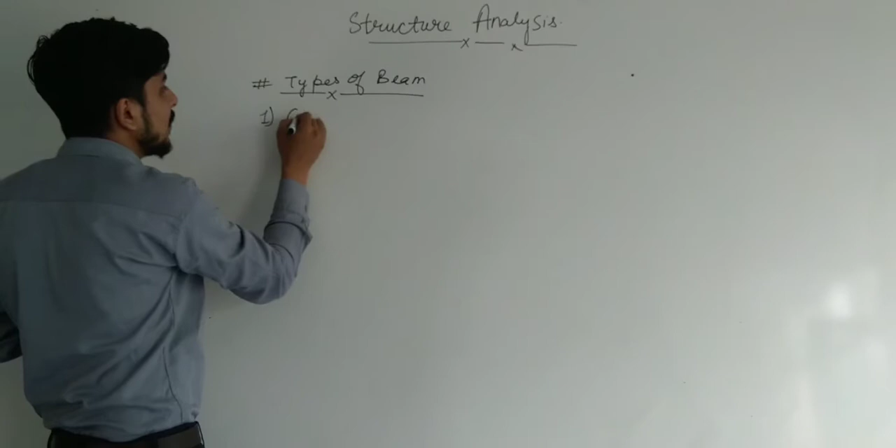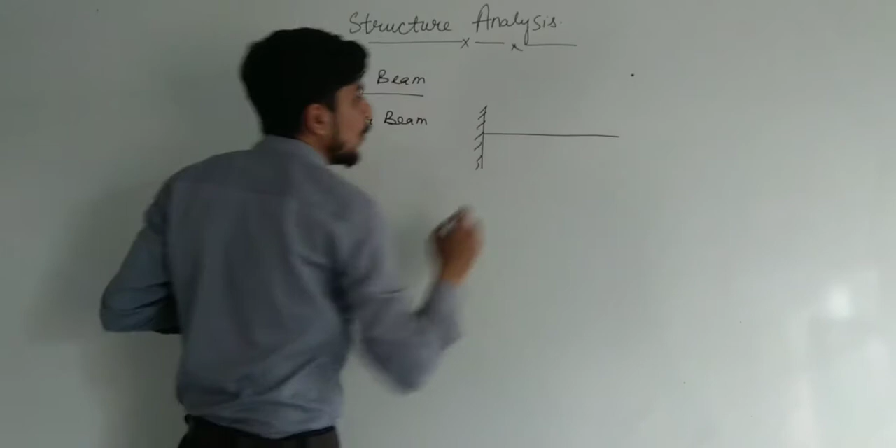Generally, these types of beams are used in the building to construct a building. The first beam is cantilever beam. In cantilever beam, one side is fixed and the other is overhang. This type of beam is known as cantilever beam.

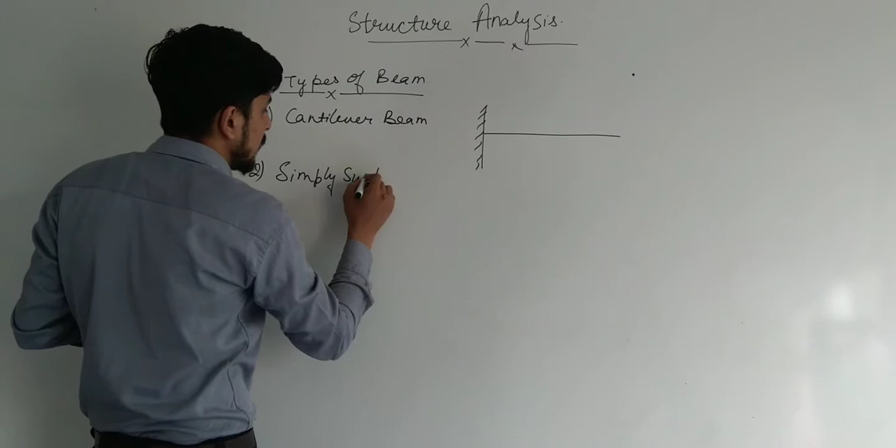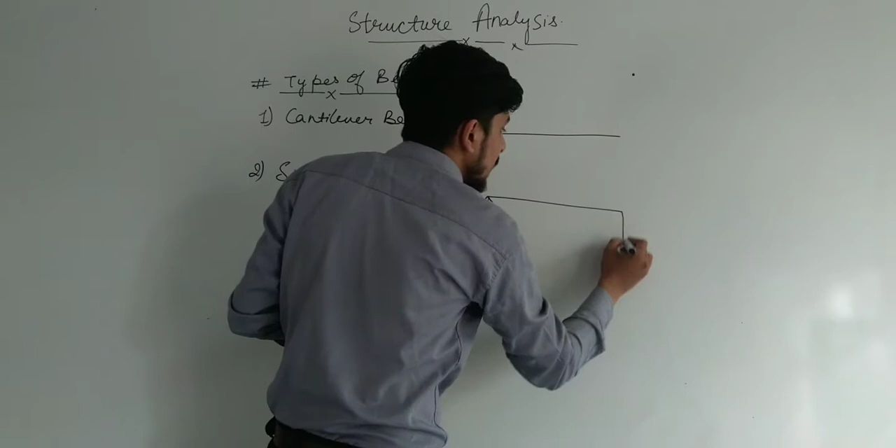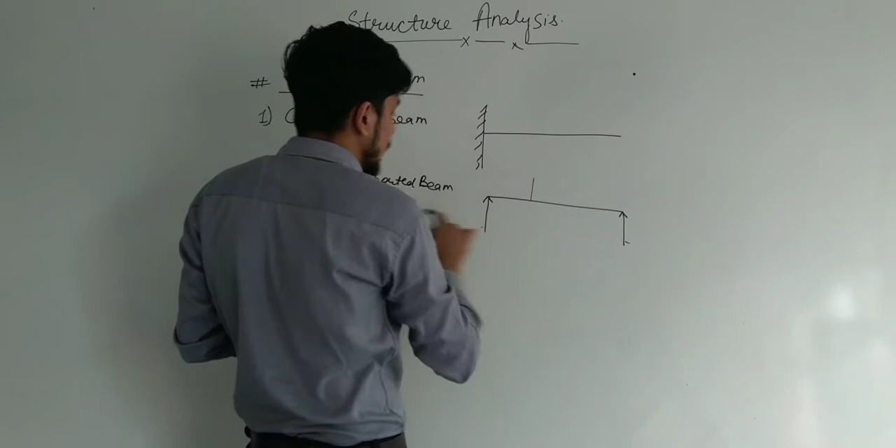The second one is simply supported beam. In this type of beam, there's a beam and the support for both the ends is simply supported, meaning there is a simple support from both the ends. You can see that this is a column, this is another column, this is a beam. So this type of beam is known as simply supported beam.

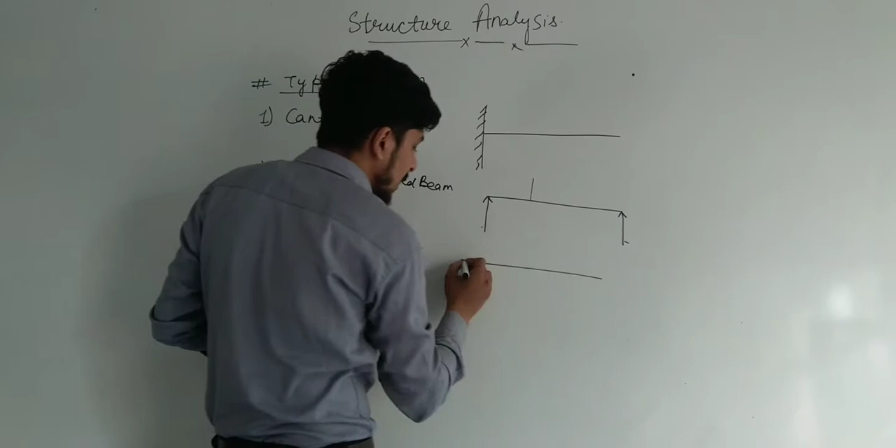The third one is overhanging beam. In overhanging beam, this is a beam, this is a support, this is another support. The beam is overhanging from one side, or you can say the other side. This type of beam is known as overhanging beam.

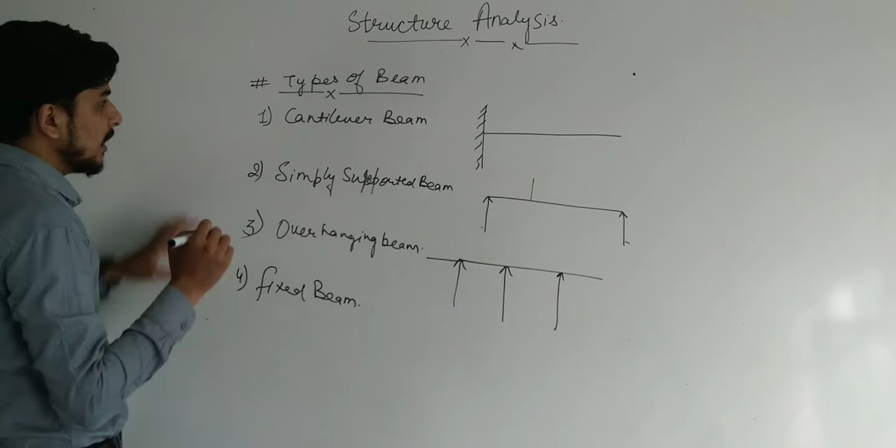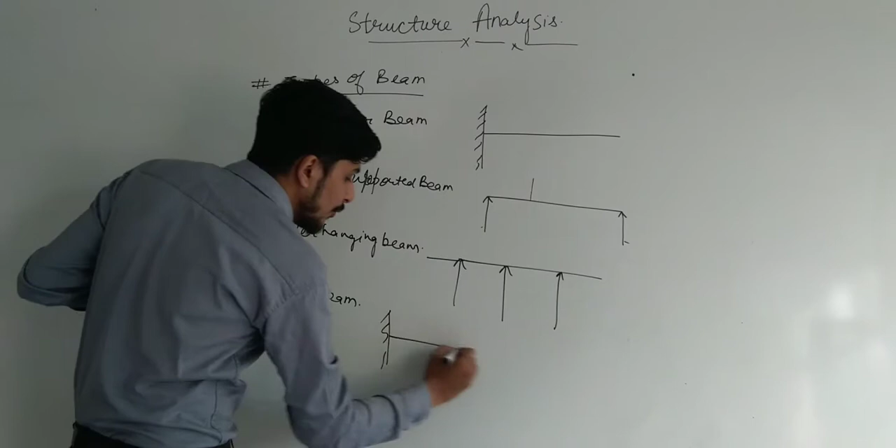Now the next one is fixed beam. You can say it is similar to a cantilever beam, but the cantilever beam has one side fixed and the other hanging. In the fixed beam, both sides are fixed, and in the middle there is a span known as the beam. So this type of beam is known as fixed beam.

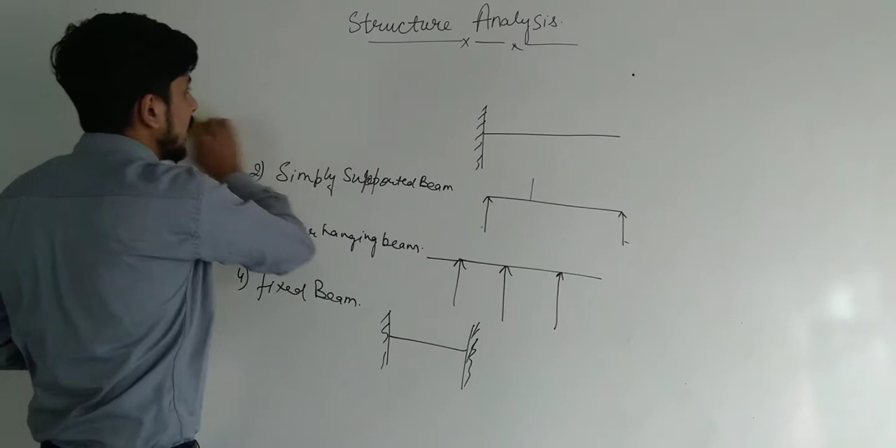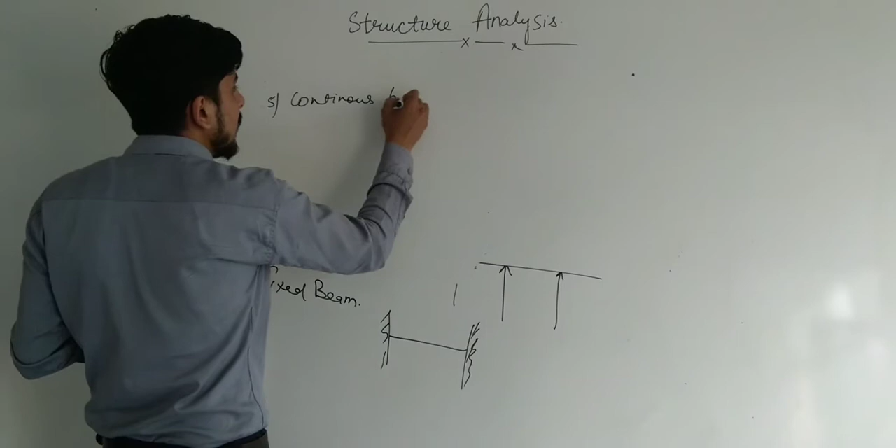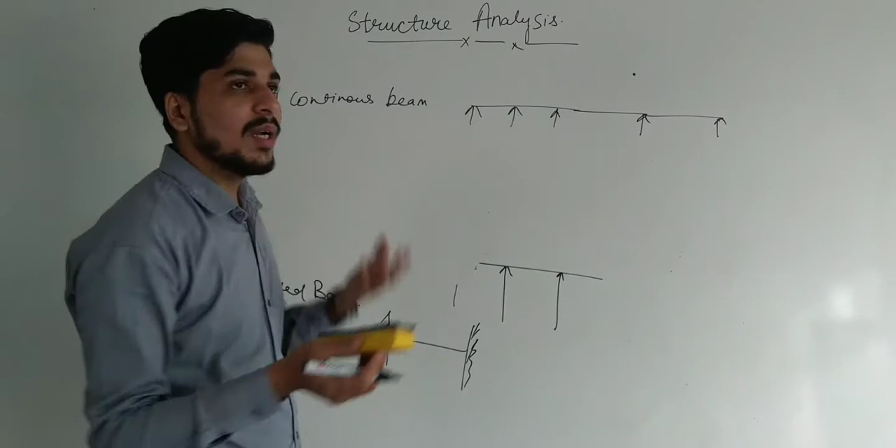The next beam is continuous beam, the fifth one. In continuous beam, this is a beam, this is the support, this is another support, and the other beam is connected and continuously moving forward, or you can say backward. This type of beam is known as continuous beam. So these are the beams which are used in a structure, in a particular building structure, at the construction site, and so on.

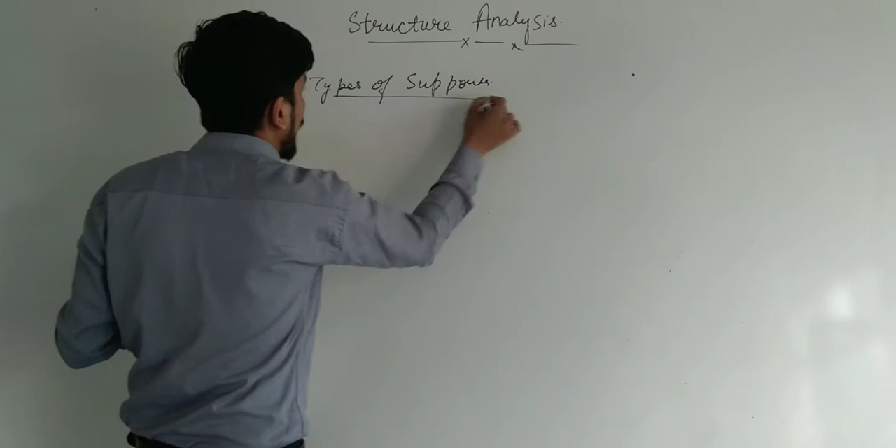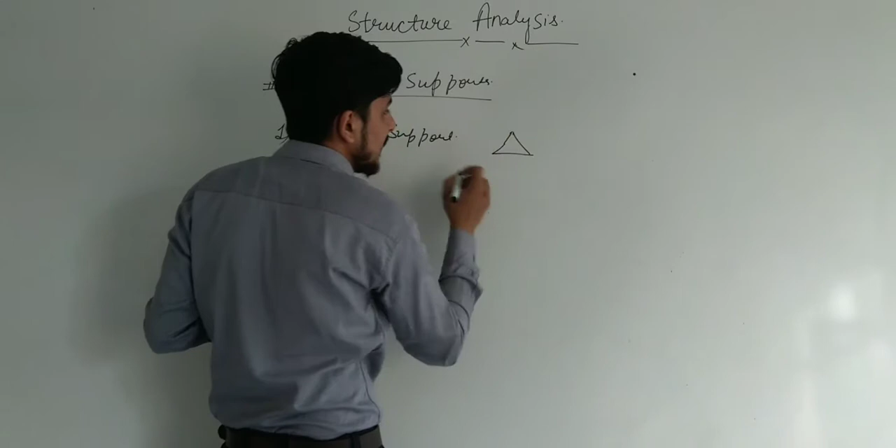Next topic is types of supports. The first support is fixed support. In fixed support, the structure for analyzing is like that - this is a beam and this is a support. Both the ends are fixed. So this is the fixed support over the beam.

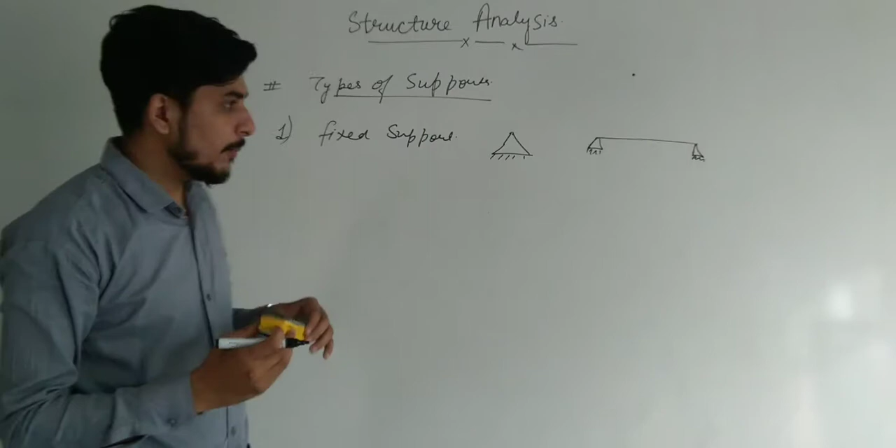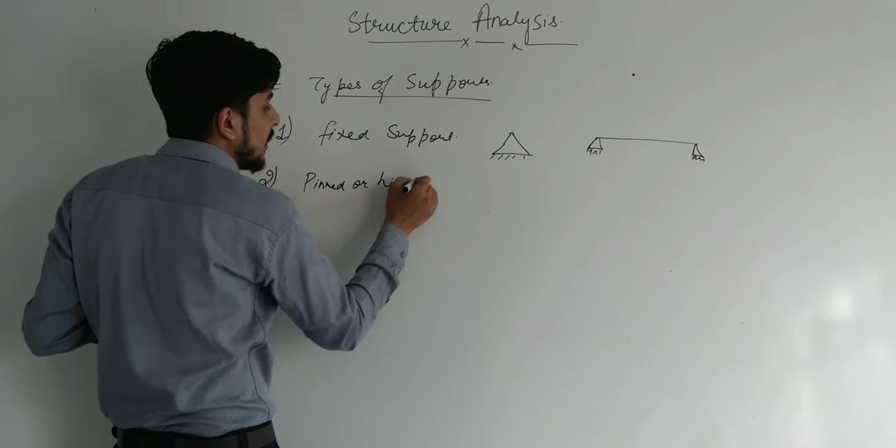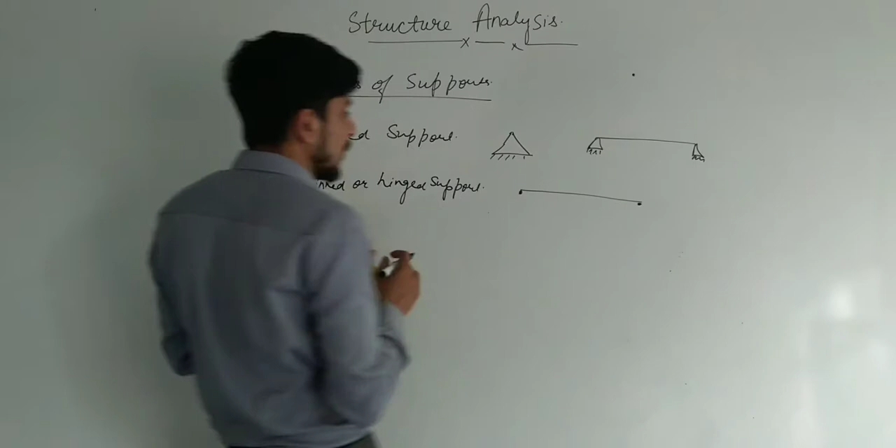The second support is pin, or you can say hinge support. This is the support, this is a pin support, or hinge support. In this type of support, both are fixed, both are hinge or pin support, and the upper beam is connected to both supports.

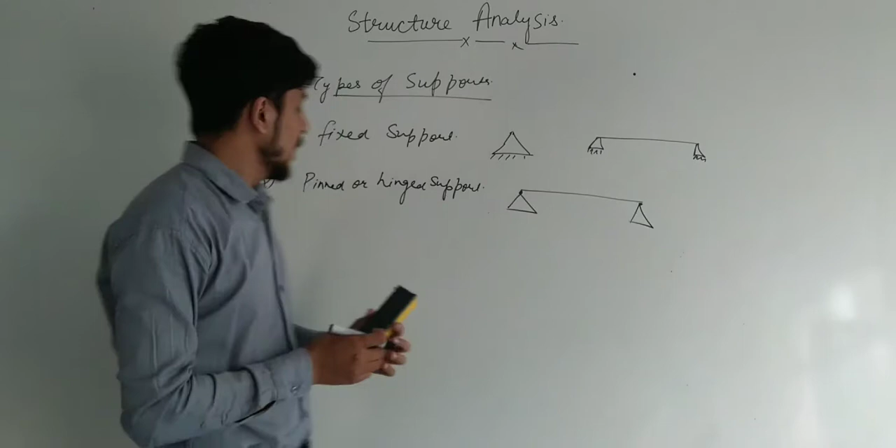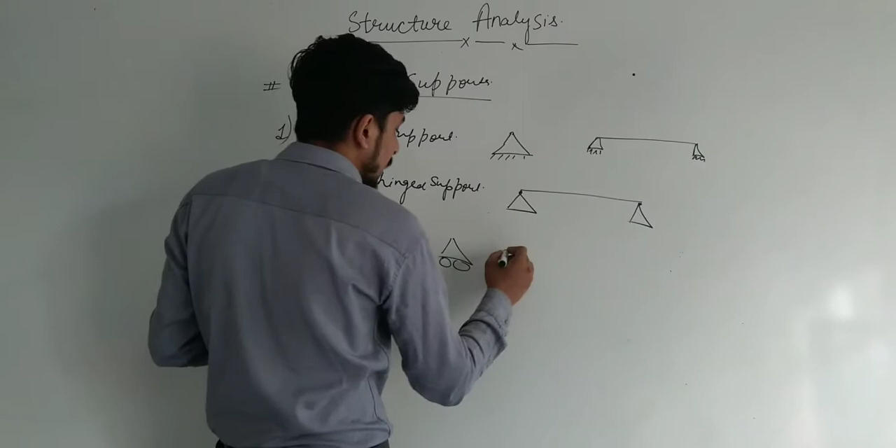Now the third one is roller support. For analyzing purposes, this is the support, this is the roller support, and the beam is connected from both ends like that. These types of support are known as roller support.

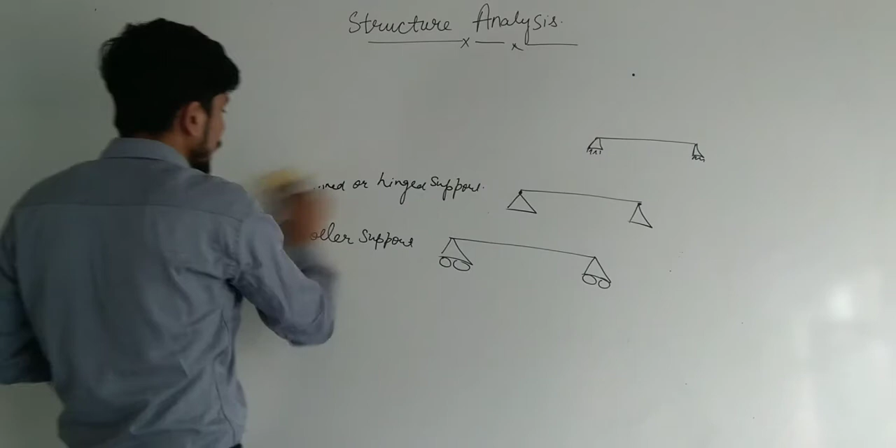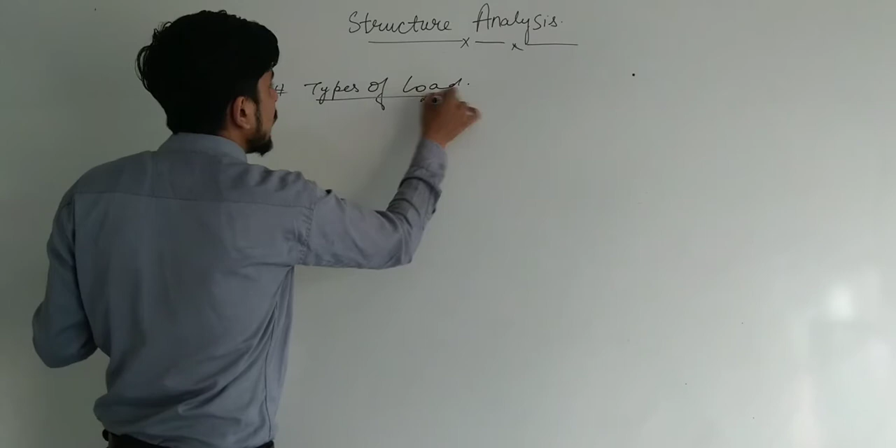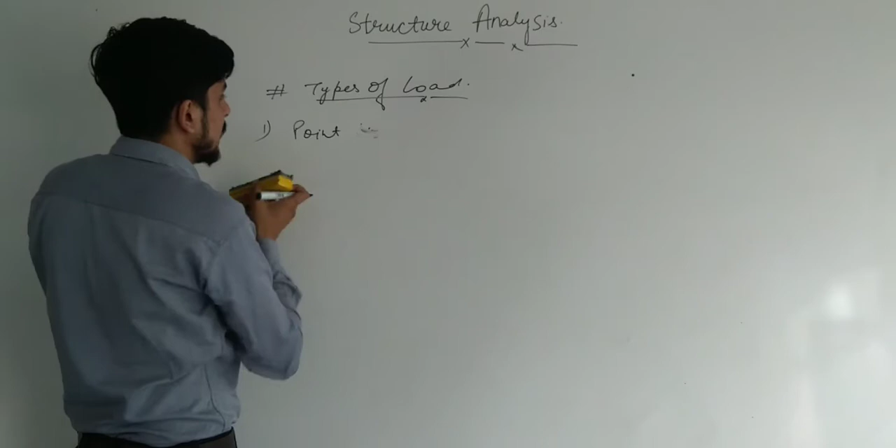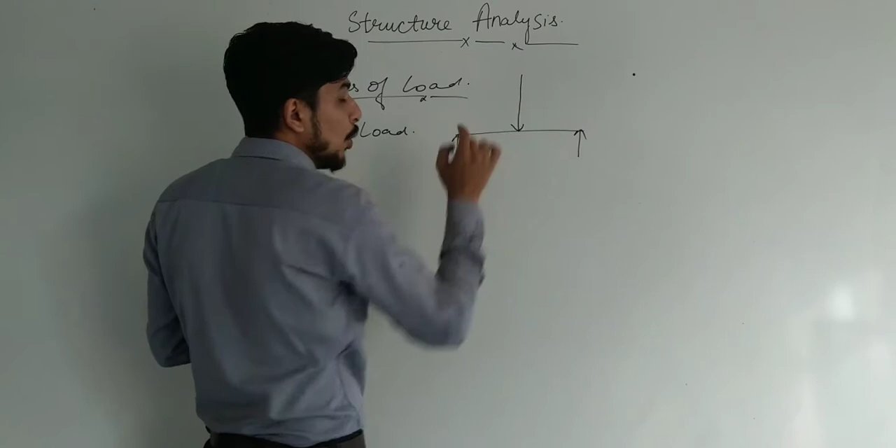Now the next topic is types of load. We generally have three types of load that we are using. The first is point load. This is a load, so point load - suppose this is a simply supported beam, and the point load is the load which is applied on a particular point on a beam. This load is known as point load.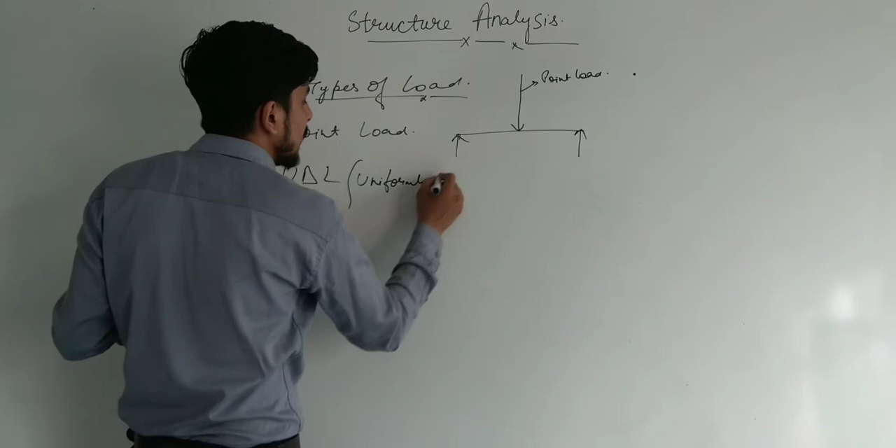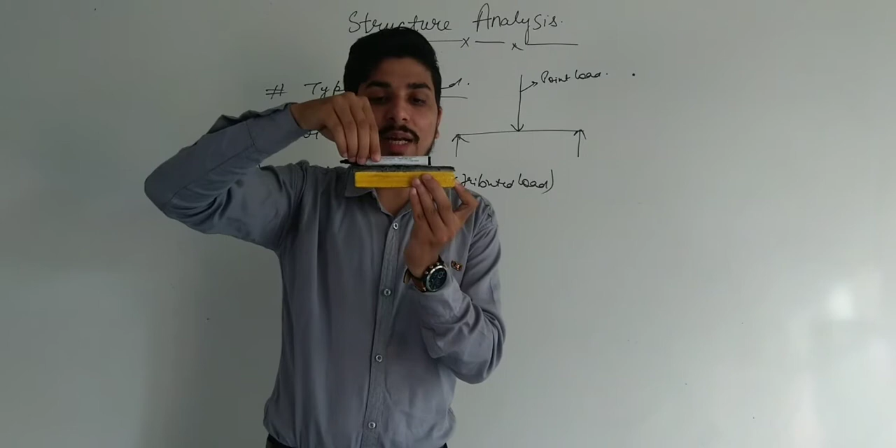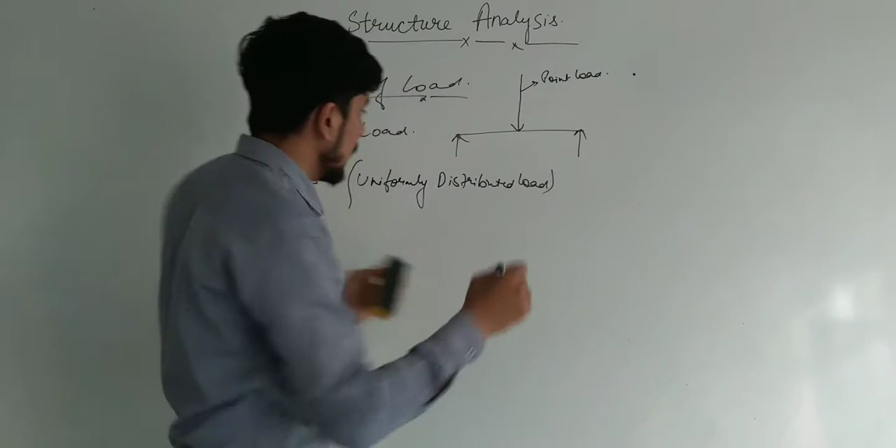Now the second load is UDL. UDL stands for uniformly distributed load. This means that for a beam, the load applied is uniformly distributed, meaning from one end to the other end the load is equally distributed at every point. You can say this is a simply supported beam, and the uniform load means that at each and every point the load is equally distributed over the span of the beam.

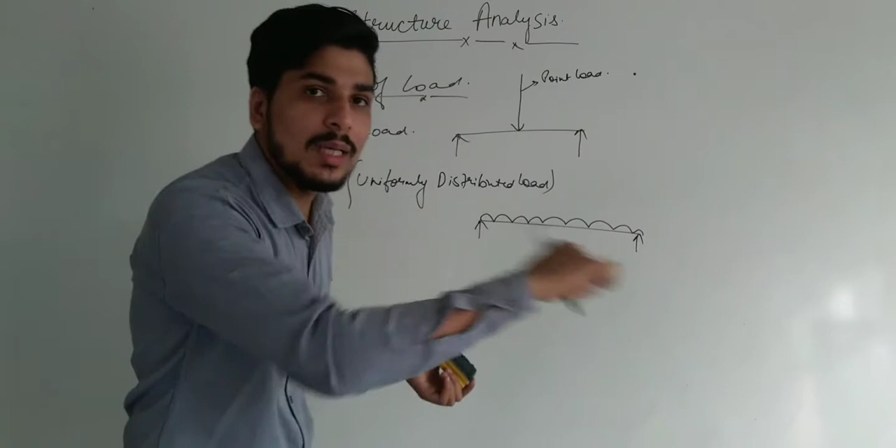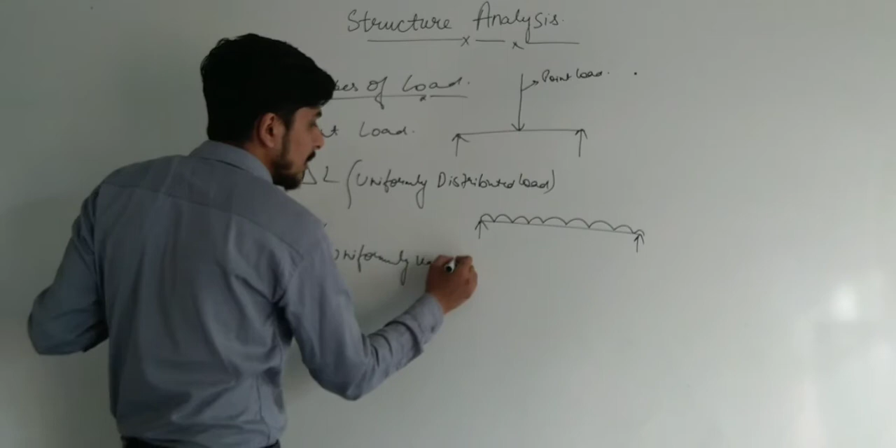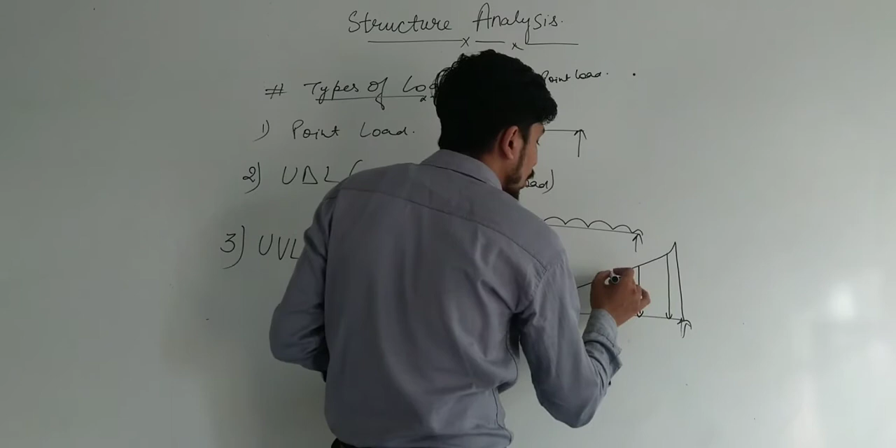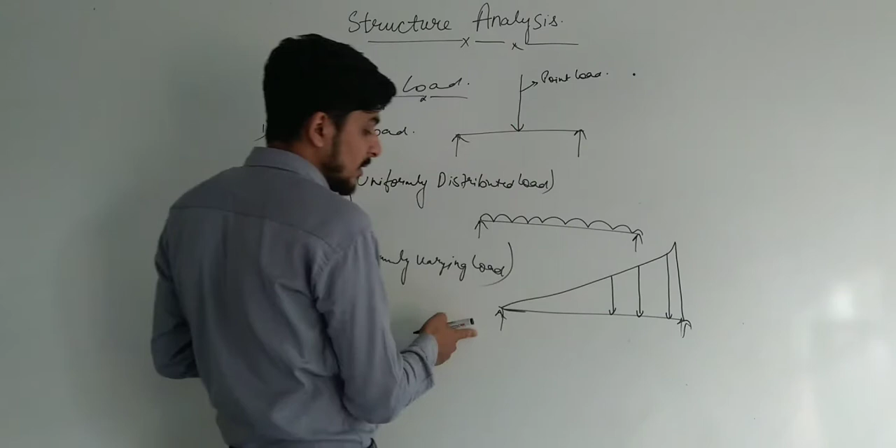The third thing is UVL, which stands for uniformly varying load. In uniformly varying load, you can say this is a simply supported beam, and we can recognize and analyze this type of load just like a triangle shape. In the triangle shape, the load is distributed all over the span from one point to another point, but not equally. Each point is not equally loaded. One end has the maximum load, and the farther end has the lowest load, but load is applied all over the beam.

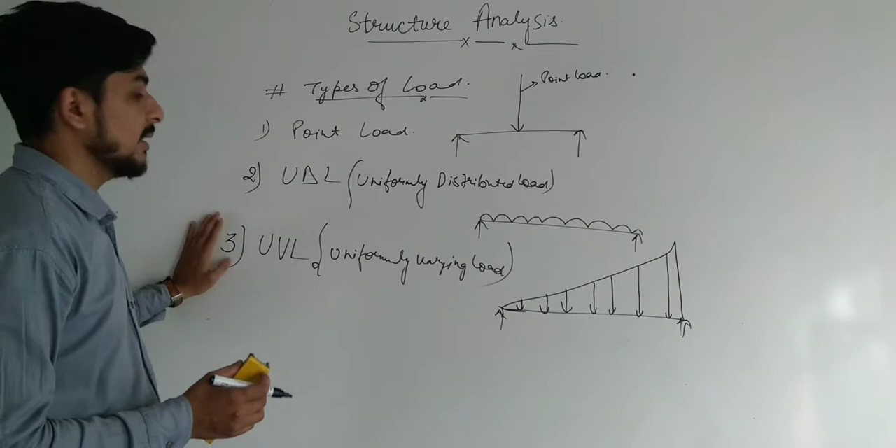So for this type of beam, the first is point load, the second is UDL, and the third one is UVL, uniformly varying load. Now we will calculate the reaction formulas for the beam.

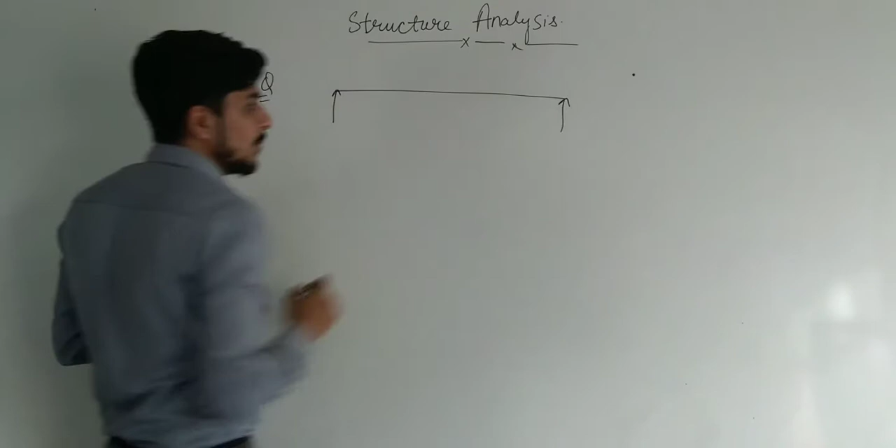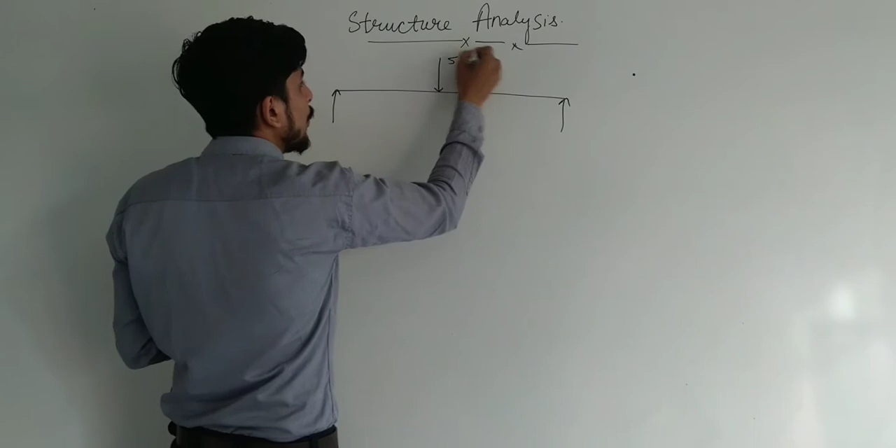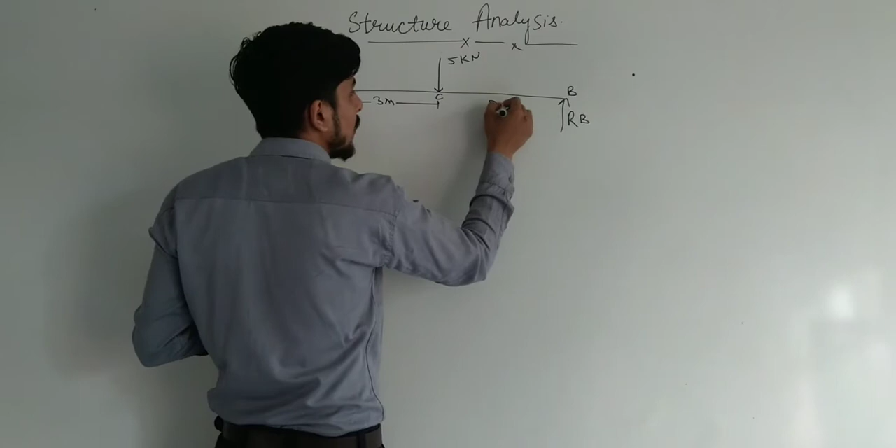So we have one question. You can say this is a simply supported beam. This is a point load applied at the middle of the span, and the point load is 5 kN. The reaction points: this is A, this is B, and this is C. The reaction at A is RA, and at B is RB. This is 3 meters from A to C, and C to B is also 3 meters, because the point load is at the middle point. The load is 5 kN.

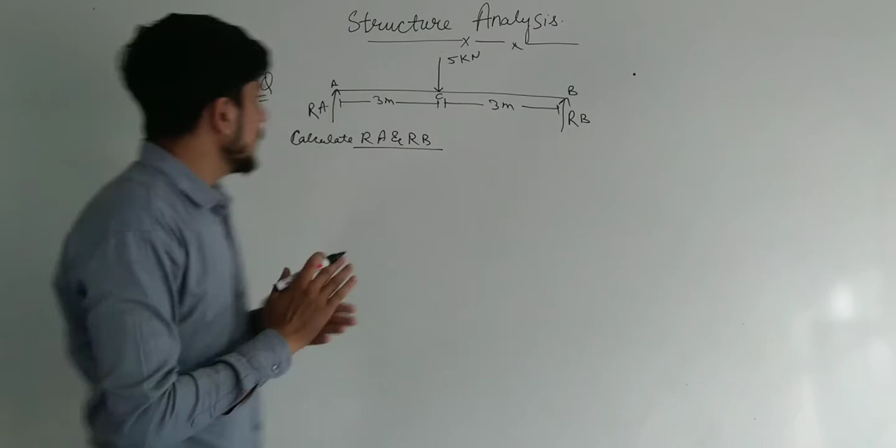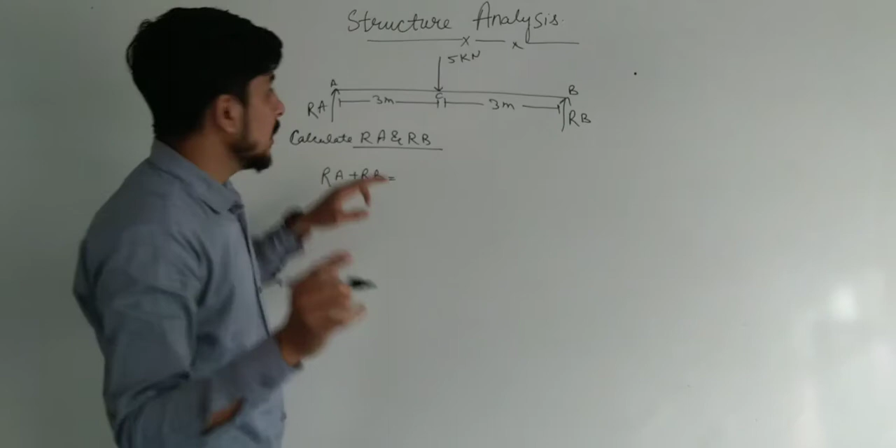So we will have to calculate RA and RB. RA and RB are the reactions or supports on the beam. First, you add both reactions: RA plus RB equals the load applied on the beam, which is 5. So this is our first equation.

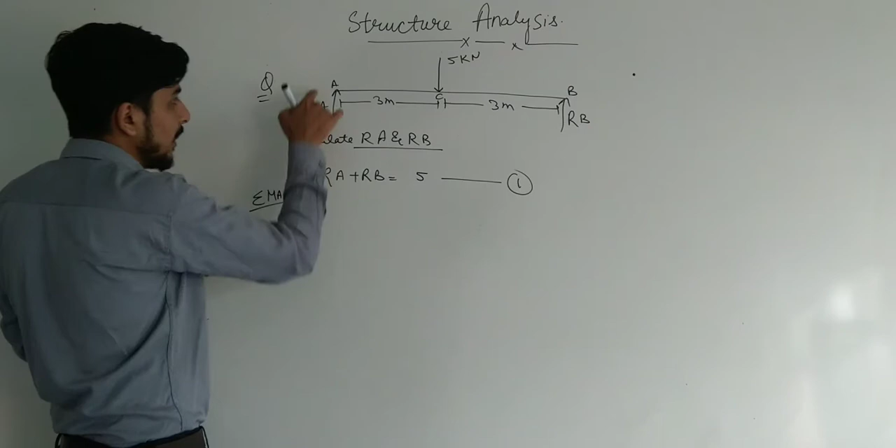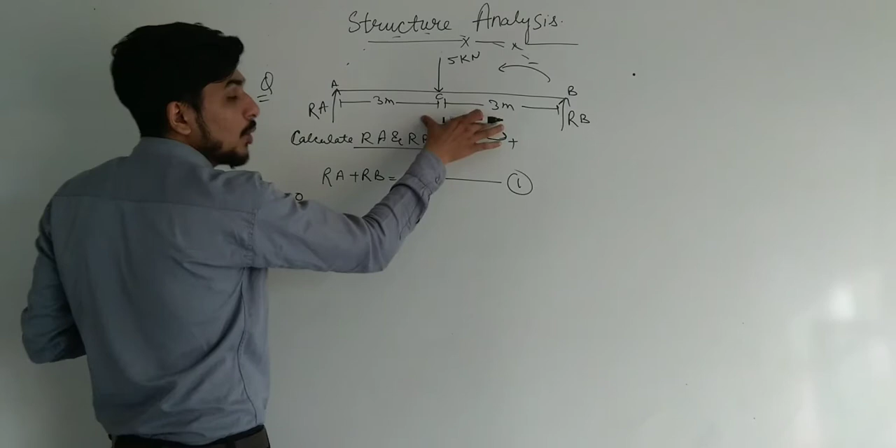Now the second thing is, suppose the moment at point A equals to 0, so we will calculate the value of RB. This is RB, this is the anti-clockwise direction, this is the clockwise direction. The anti-clockwise direction is negative and the clockwise direction is positive. So RB applied at point B is RB multiplied by the total length, which is 6, and since this is negative, it becomes minus RB into 6.

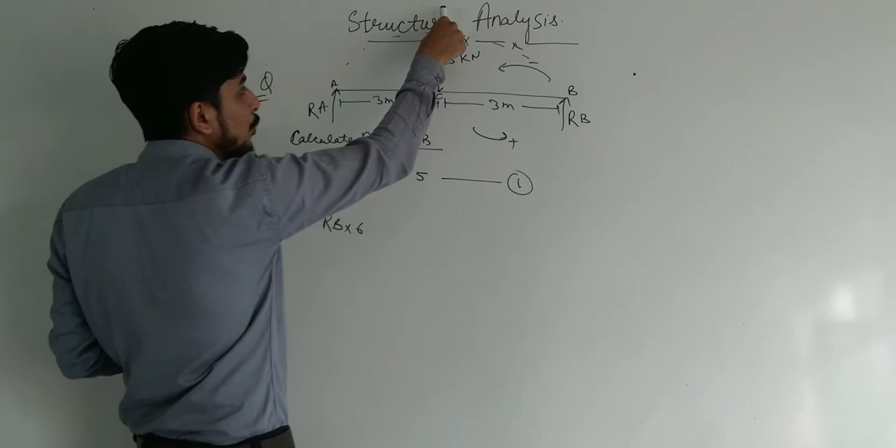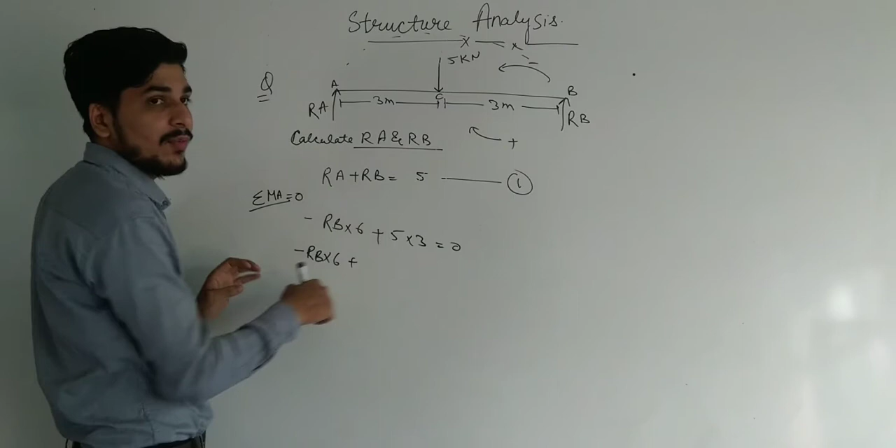Now this 5 kN load is moving in the clockwise direction, and we take clockwise direction as positive. So this is positive: the load is 5 multiplied by the distance, which is 3. This equals 0. So minus RB into 6 plus 5 times 3, which is 15, equals 0. So 6 RB equals 15, so RB equals 15 by 6 kilonewton.

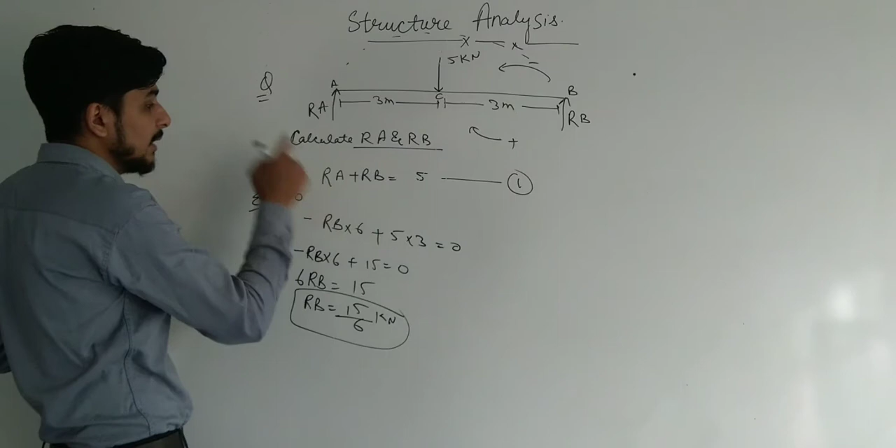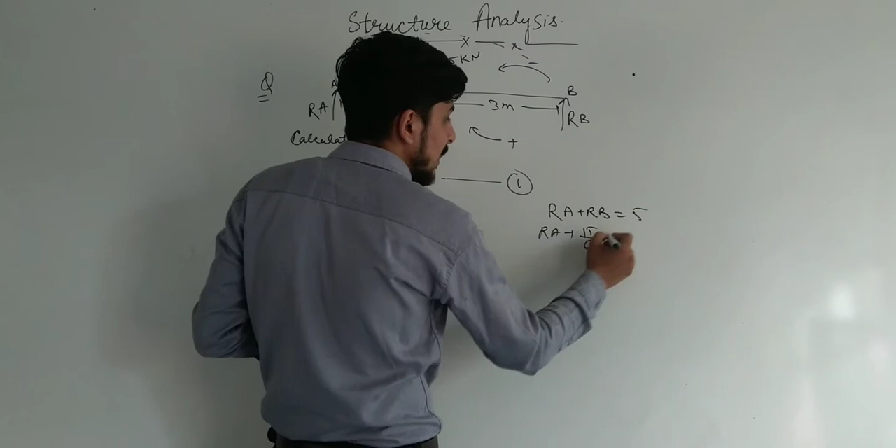So from here we calculated RB. Now put this value into equation 1 to calculate RA. RA plus RB equals 5. So RA plus 15 by 6 equals 5. So RA equals 5, and since 15 by 6 is positive on this side, we take it to the other side as negative.

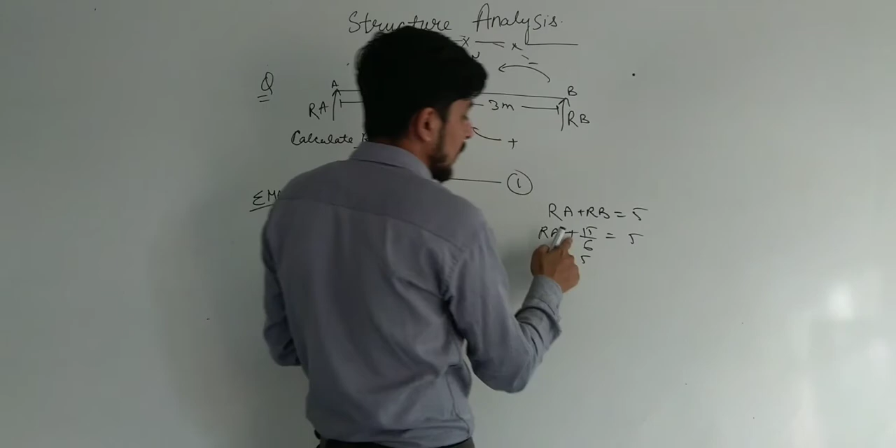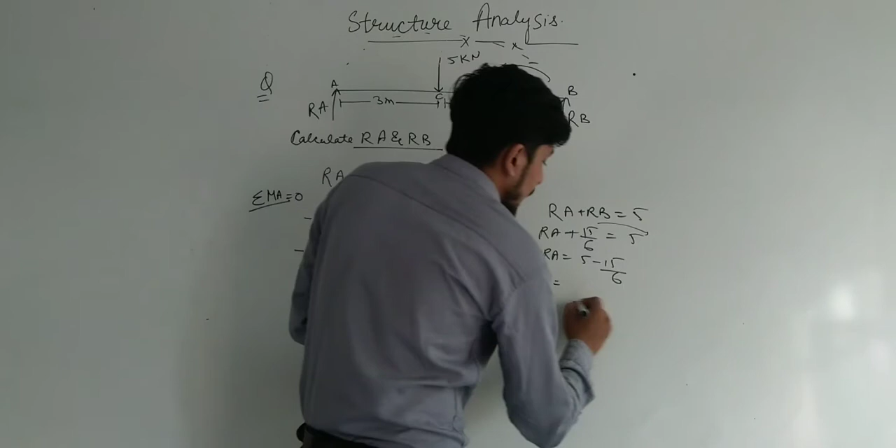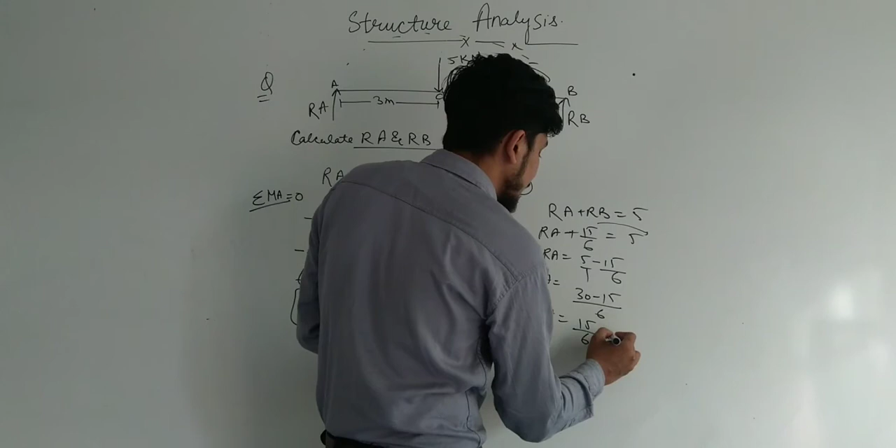So it shifts to the other side as minus 15 by 6. RA equals, taking the LCM of 6 and 1, the LCM is 6, so it's 30 minus 15. So RA equals 15 by 6. So the value of RA is 15 by 6 kilonewton and the value of RB is 15 by 6 kilonewton.

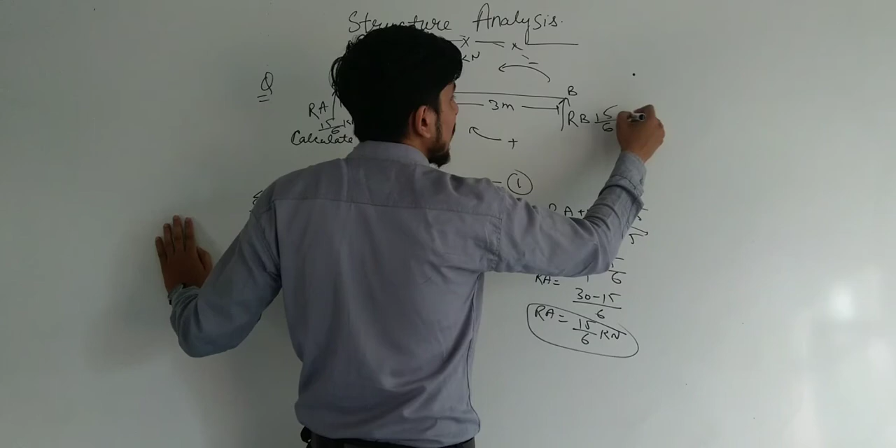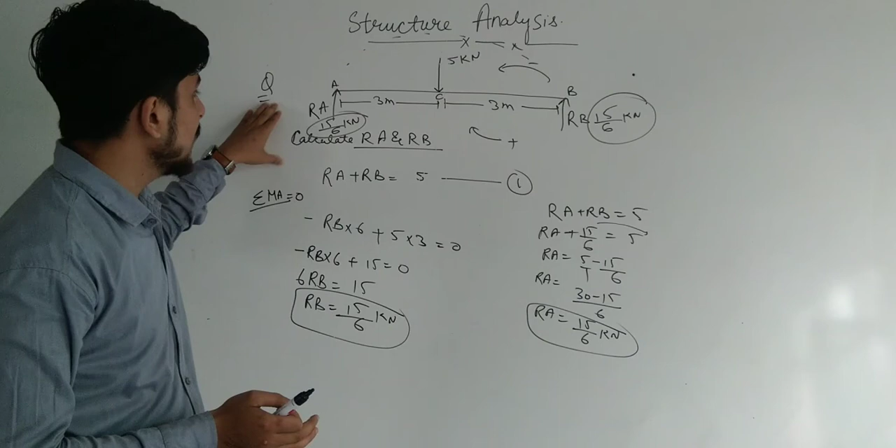These are the values for calculating the moment, or reaction. So this video covers the types of load, the types of beam, the types of support, and one numerical problem for calculating the reactions RA and RB. Thank you.